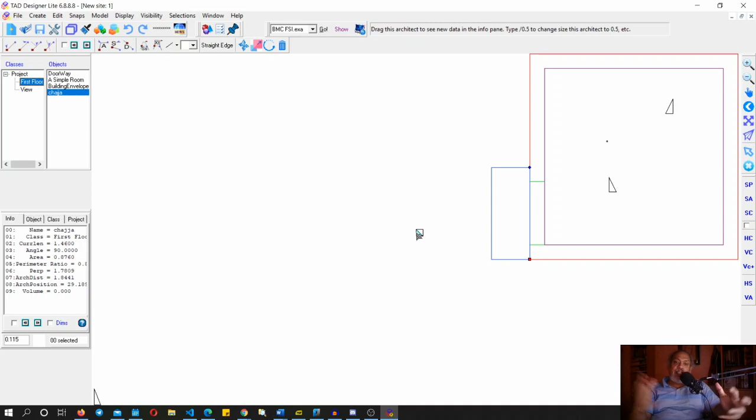Now, as you may have seen in the earlier video, I had explained about the architect and these two helpers, and let me revise that information again, because these three personalities are never seen in any other CAD software. People who have experience with, say, AutoCAD or SketchUp or 3ds Max will find that all those software have only the mouse and nothing else. Whereas TAD gives you these three personalities so that you can go ahead with your design very fast. Why so? Because it's a way of telling that I am right now focused on this particular object, and you train your brain to know what object the software is focused on. So you reduce the time needed to become familiar with what you are connected with.

You may have seen in certain text editors or word processors a blinking line, right? The line keeps blinking, and then you know that when you type something, it will be coming on that blinking line there. That's the way word processors work, where you can make out where that particular typed character is appearing.

Okay, I'm sorry, I'm a little distracted because I have this 2 monitor setup, and that sometimes misbehaves. The mouse cursor disappears, and that's irritating.

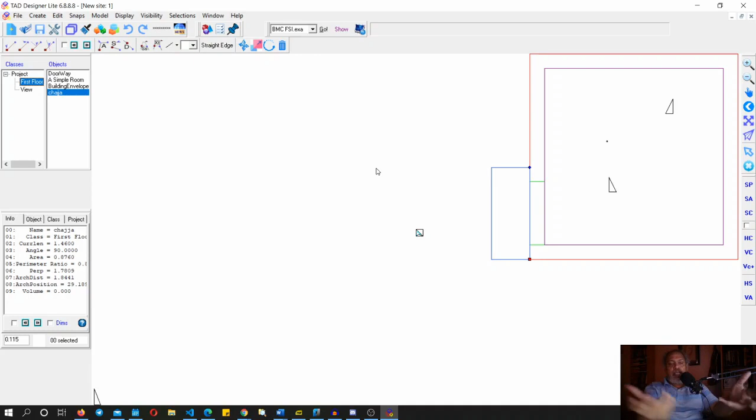When the mouse cursor disappears or that caret stops blinking and you have a completely blank screen, which does happen sometimes in some word processors, you're lost. You do not know where you are and where the next letter you type would be.

There are times when you thought that the letter should have come on this part, but then it turns out that it appears somewhere else, and then the caret starts blinking there. It's really very irritating.

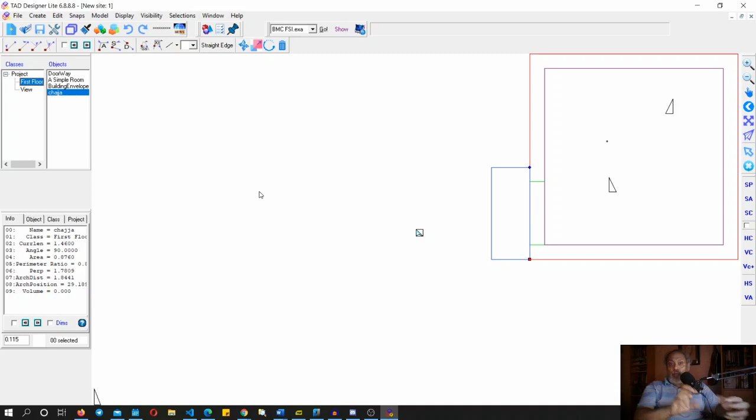So along the same lines, if in a graphics program all you had was your mouse and nothing else, then half the time you are actually teaching that software where you are located, and you're clicking on things and then you're seeing the grips over there, and then you go about doing it. That doesn't happen in TAD. In TAD, these helpers are always telling you that, okay, in this particular case, I am on the Chajja, and that Chajja is placed on the first floor. So you are comforted. You don't need to solve that particular problem at all.

You would take the architect and move that architect around in many different locations, and as that architect is moved around, you'll find that it actually gives you information here. This is called the info pane, P-A-N-E, like a window pane, and you will see that there are various dimensions and areas which are related to wherever the helpers are. The helpers and the architect are always going to be there inside a TAD model. That's a given, that's a concept by which it works.

Now you can very precisely locate the architect. Say for example, I want to locate the architect at this particular corner. I can just Control J that, and it can actually precisely locate itself on that particular corner. Okay, so that you can do with this particular button also, the fourth button here. These 4 buttons are for snapping the architect at various locations.

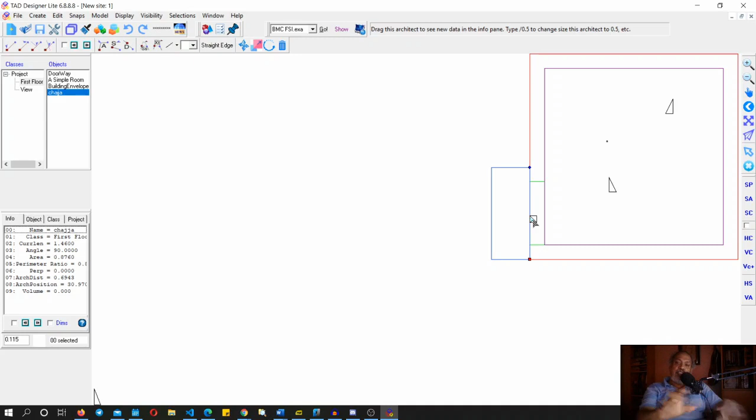If you press this button, it snaps to the first helper. So the architect is now shifted and precisely located itself to the first helper. This one locates itself to the second helper. And if the architect is somewhere else, and this is where the helpers are, if you press this, that is snap to the foot of the perpendicular containing the line where the helpers are, then that's where the architect will go. So you have these 4 different ways by which you can snap the architect very precisely, and that gives more control over the information which you are getting here. So that's one very straightforward way by which you precisely locate the architect inside TAD.

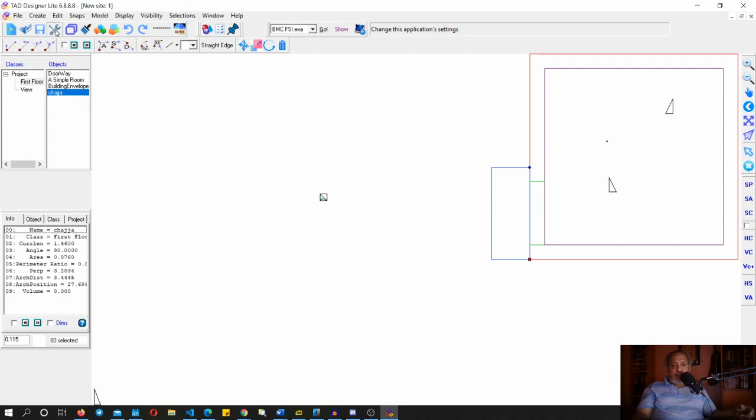Now there is another way which I many times don't use because I'm a free-form kind of thinker, but I do respect people who want to use a modular grid. They'll sketch out on a dotted paper or a graph paper or something like that. So you can do that here also. You just switch on the grid by going to the preferences, and once this grid is switched on, the architect will always snap onto the nearest grid. Okay, so this is another way by which the architect is moved around.

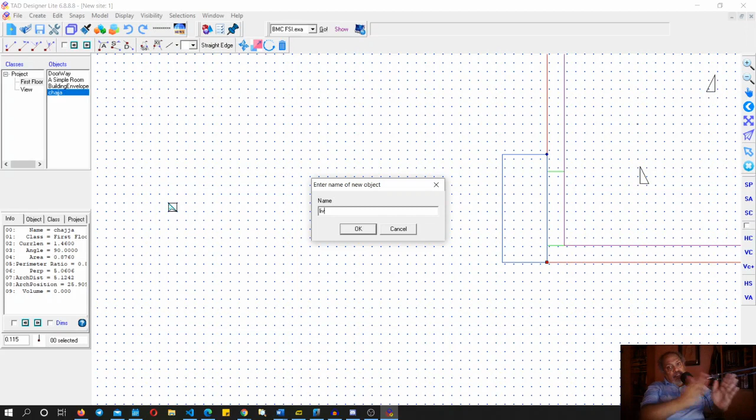And not just that, when you're drawing an object the way I showed in my earlier video, it will snap the bottom left corner to the nearest grid, and the other 2 dimensions, the width and height, would be made on the number of units which that grid is consuming. So if you have marked out a particular rectangle which consumes, say, 3.75 grid units, then it will actually snap to the 4th grid unit, and so you'll always get multiples of the grid size. So as you can see, it is actually snapped here clearly, and this length is exactly a multiple and this height is exactly a multiple of that particular grid size.

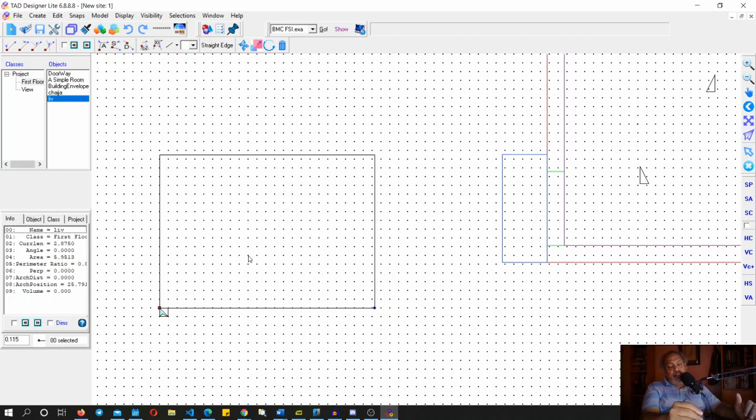Now it may not look as if it is snapped correctly. That's because of a detailed thing which happens inside. All CAD software has this situation where it has to convert numbers like 3.986395 into integers, because the screen is a set of integers. It's got dots over there. It can't handle anything halfway in between, and that's why you may think that it is not as per the grid size, but if you zoom in enough, you will find that it is actually on the grid.

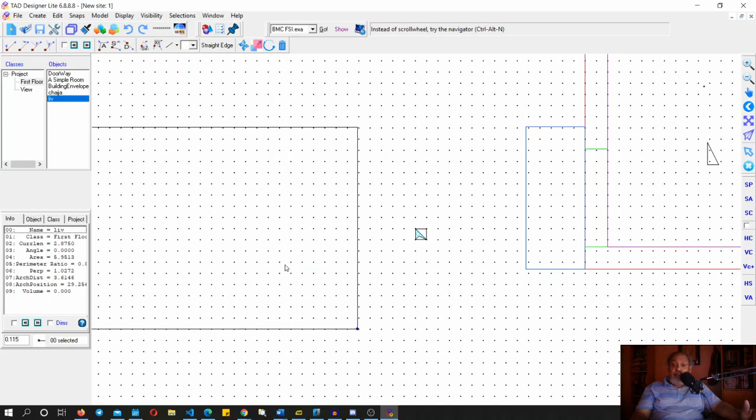Or you can measure it yourself, and you'll see that the current length is 2.875 from what I can make out from here, and the grid size is 0.115. So you'll see that that is actually divisible by 0.115. If you want, you can check that. So let's do that.

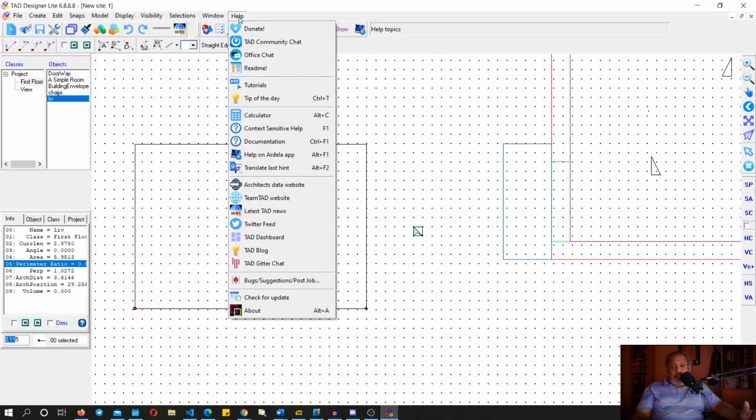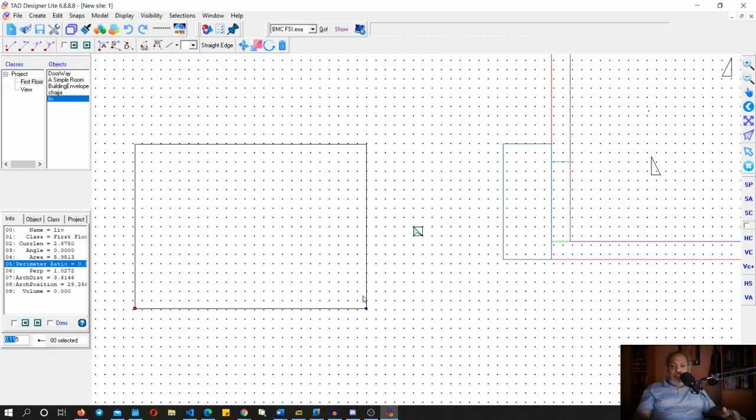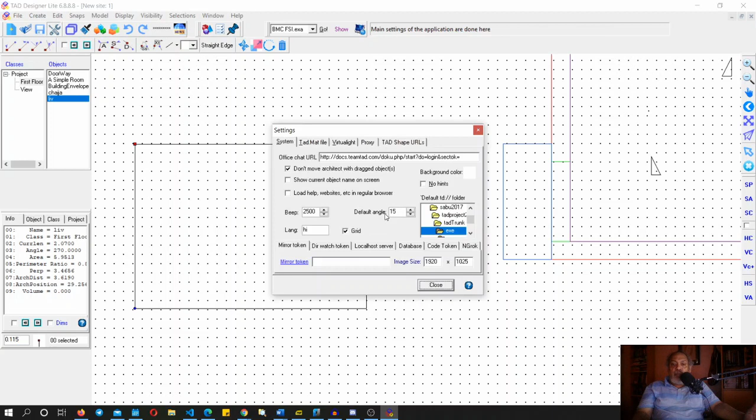Let's take the calculator and see: 2.875 divided by 0.115, and you'll find that it is exactly 25 grid modules. So there are 25 units of the grid here, and whatever that particular height also would be, it's grid units. This is another way by which you can create precise sizes of shapes if you want to. I personally don't use this feature much, but I know people who do, and I respect that capability.

Now you may wonder, what is that grid size? I forgot to tell you this - the grid size is actually the size of the architect itself. The architect is now sized at 0.115, and if I park the caret here, that blinking line, I can move the architect around by just pressing the arrow key. The one jump of the arrow key moves the architect precisely to the next point, by which you can very precisely locate objects.

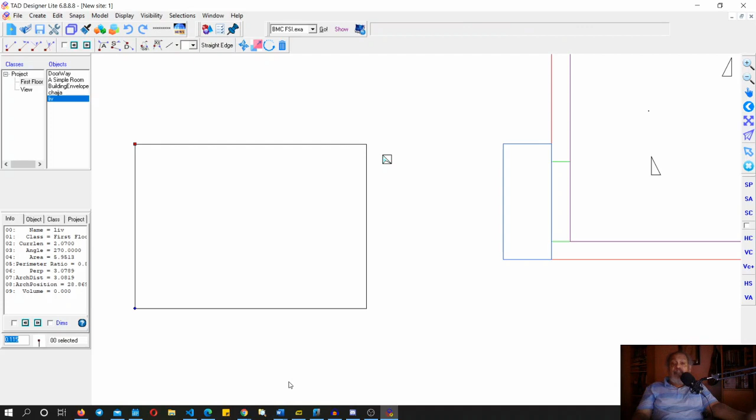Many times I can use the architect itself as a spacer. Suppose I use the architect's dimension as 0.115, which I often do because the internal walls of rooms in New Bombay are all 115 mm, which is 4.5 inches more or less. So this 115 is kind of a unit which is seen many times. Now let me zoom in a little bit here so you can see it for yourself.

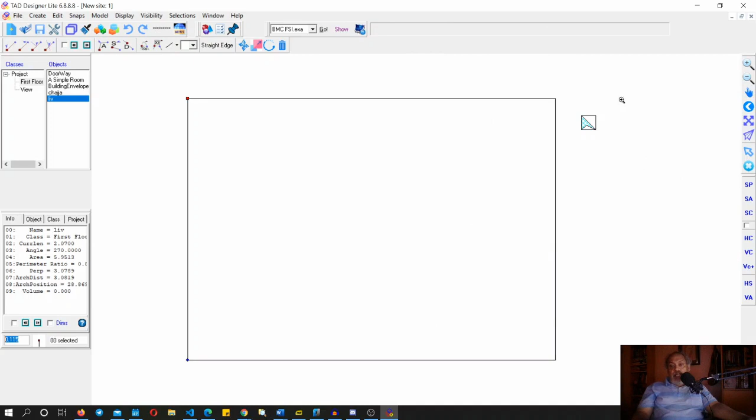I can keep the architect at a particular location and snap an object in such a way that it is precisely located on one of the four corners of that architect - I can snap it to the top left corner, or the top right corner. Sorry, I think I accidentally shifted the architect itself. If I right click on that architect, it moves back to its earlier location - it's like an undo for the architect.

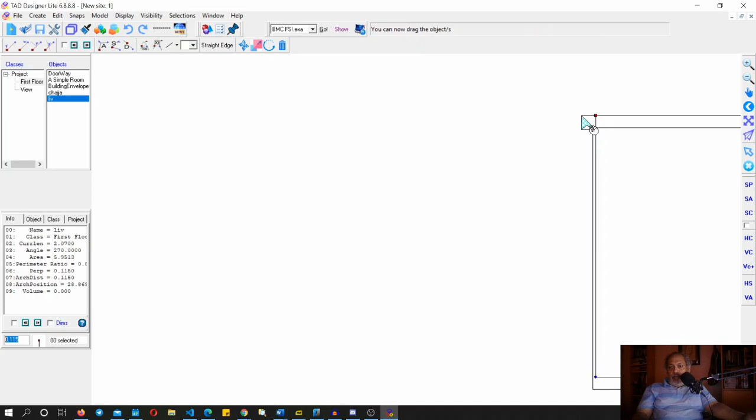So now I go to the top right corner and the object is snapped over there, and now I'm snapping the object to the bottom right, and now I can snap it to the bottom left corner. So there you have it - this is another way by which you can very precisely relocate objects and resize them based on your dimensions. Sorry, I didn't show you the resizing part, but you will come to know very soon.

Now there is another way by which I can shift the architect. I've temporarily shifted it somewhere here, but let's say I want to resize this particular object. Let me move this object somewhere here, and now suppose I want to make this exactly - what is the current dimension? It is 2.07. Suppose I want that dimension to be 2.5.

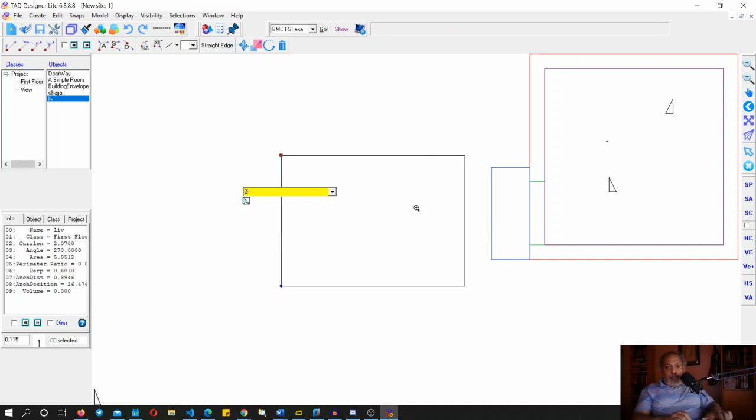So what I do is I just type 2.5 and say angle of 0. What TAD does is take the architect, figure out the angle - 0 being the angle to the right of that first helper - and move exactly 2.5 meters from there. So I move it over there. Now I know that this point is exactly 2.5 meters, which you can verify with the perpendicular distance here.

It says 2.5. Now what I do is use this button - I can use F3 or F4 hotkeys, and make sure that the helpers are on this edge, because I want to now stretch that so it meets that location of the architect. Now that command is this particular button - it says stretch the current side. So I just stretch that, and there you have it - I have precisely resized it to 2.5 meters.

So I gave you two commands here. One is the way to move the architect to a precise location using a dimension, a space, and the angle sign. This is what I had written - I'll show you. So I wrote 2.5, space, angle 0. Whatever your earlier commands are, they're all shown here also, so it preserves the history of your various commands in case you want to repeat them later.

Suppose you want to use the same command and I want to make it square, so I'll say minus 90 degrees. The architect will go down here with respect to the first helper, to 2.5 meters down there. Now I press enter.

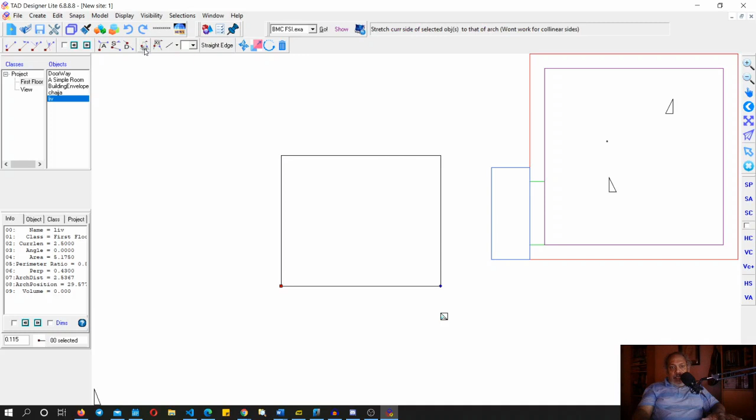So this is now 2.5 meters, and I again press the stretch command, and now you have a perfect square which is 2.5 meters by 2.5 meters.

So this is another way by which you can get precision, by which you are commanding the architect to move to particular dimensions. Another way the architect can be moved is, say I want to move it diagonally. I'll snap exactly to this particular corner, and now I don't know what the angle here is. I could find out through Pythagoras theorem, but let's say I don't want to know. I know this is snapped here and the first helper is here, so there's an imaginary line you can join from the first helper to the architect.

And now I'll say 2.5. I don't give any angle, nothing, I just press enter. So what it does is this particular length from here to here is exactly 2.5 meters. It extrapolates on the same line and puts the architect on the dimension.

Now what I'll do is stretch both these edges. I'll use F3 and stretch this here, then press F3 again and stretch that here. Now I've got a square where the diagonal is actually 2.5 meters. You can see that for yourself.

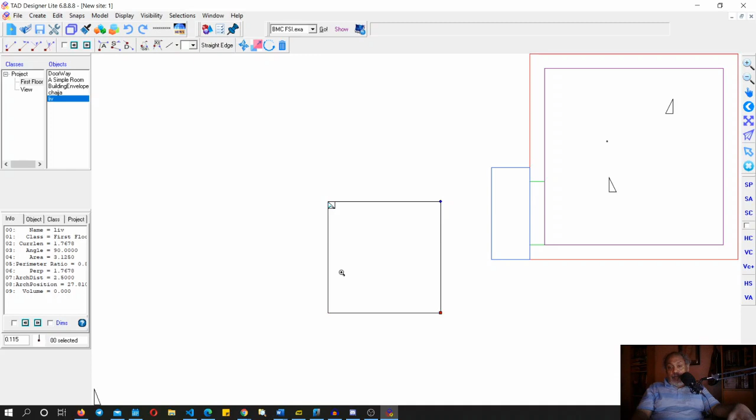I shifted the helper using F3 and F4. You can use these two hotkeys to move the helpers around on the same object. And now when the helper is here, I can see the dimension from this corner to this corner by this distance, which is the architect distance. It is saying 2.5 meters.

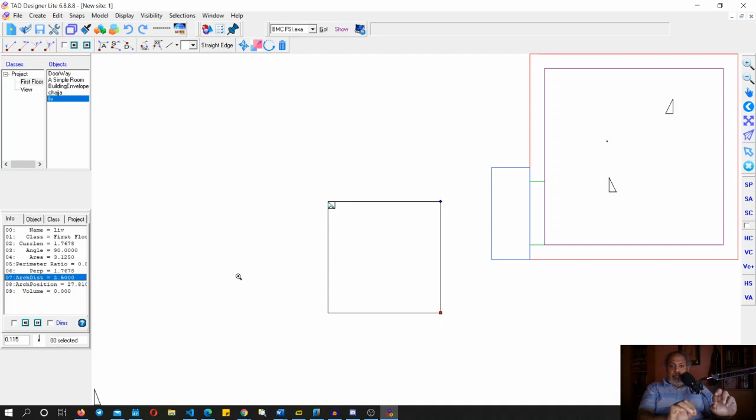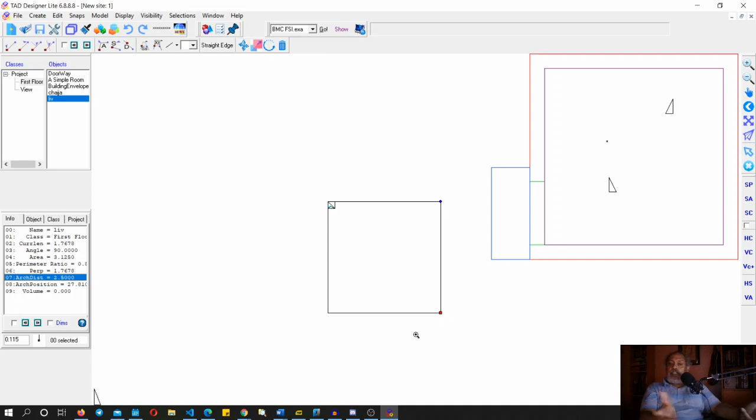So you have two basic methods by which an architect can be moved using that yellow command line you saw. One is by just giving a number and pressing enter, in which case it extrapolates along the line from the architect to the first helper. Or you give a number, space, the angle sign, and a value for the angle, and it will locate that architect as per that dimension and angle. This is more than enough to really locate the architect very precisely wherever you want.

Mind you, the helper is making a big difference here. It is giving you a temporary origin, as they say in AutoCAD and such. I think you can set something of this sort there too, but you have to manually set it. Here it is always available because you can just shift the helpers to wherever you want, and that origin point starts from that helper.

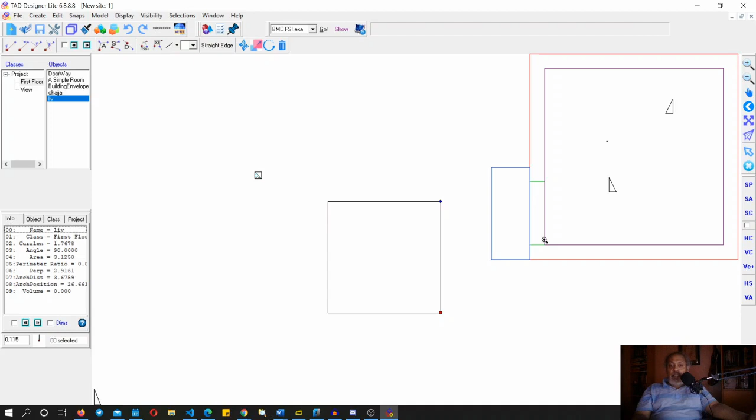Okay, so that is another way to do this. A third way I want to show you is that once you locate the architect very precisely, let's say this architect was located here precisely, you can move other objects. If you have selected many objects together, let's say I have selected all these three objects, now I want to move this first helper to this point and relatively everything else also shifted.

I can do that by using this particular key. So I just click that and then the button. So everything is relatively moved in such a way that the first helper is precisely on that particular architect, and everything else is relative to that.

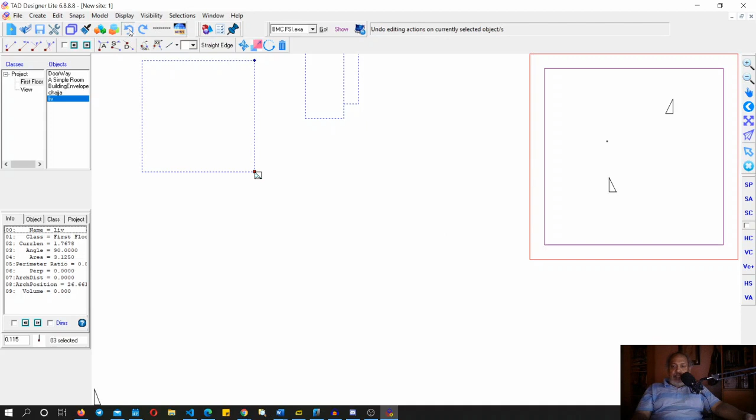Now TAD has got a beautiful undo system where each object has got its own undo. So now that I've selected all these three objects together, I can undo all three together. This undo feature is extremely useful because since each object has its own undo history, you can go to a particular object and undo just that object.

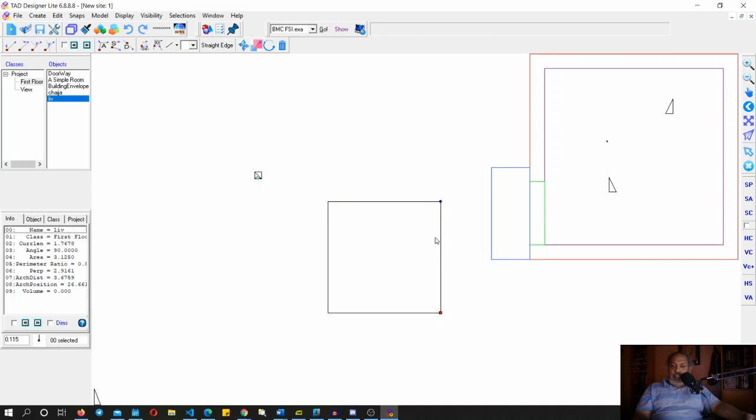Say I've done all these edits. I'll remove all the selection. Now I can undo only this particular object because that's the current selected object. So if I do that, it actually undoes just that particular object, without affecting the other two which were also part of that edit history, which is another very powerful feature.

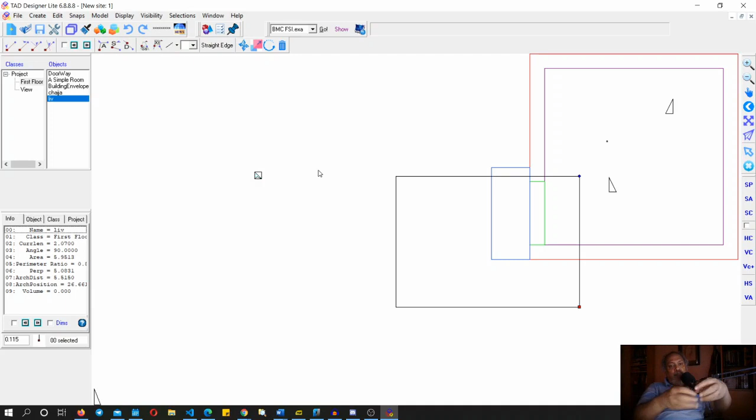Many times in CAD software, AutoCAD and many others, you have carried out a series of edits and then you realize you want to undo it, but you don't want to lose something you've edited. You want that edit to happen but not the rest, and then you're stuck because if you're undoing, it will undo in the same order as you have done something.

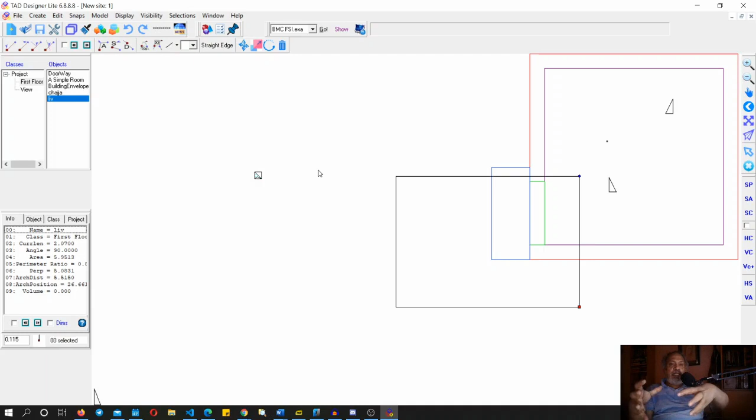I don't know why these people have never solved that problem. Invariably, you end up creating more and more files because you don't want to lose your work. You'll save the file somewhere, then undo everything, and now you've got two files, and you'll pick up that object from the earlier file. It's such a mess actually. That never happens in TAD. You are always working only on one file all the time.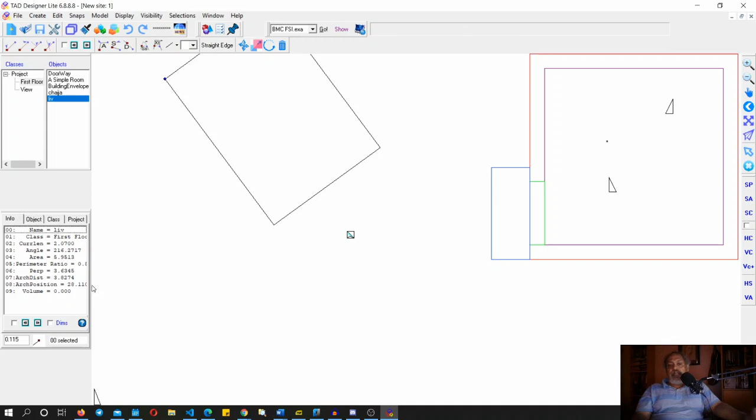So the third thing which I want to show you is how do you rotate. Rotation can be done free form, so I can just rotate around the anchor like this, and when I leave the mouse it will rotate, but I don't know what angle it is unless I look at all these values here.

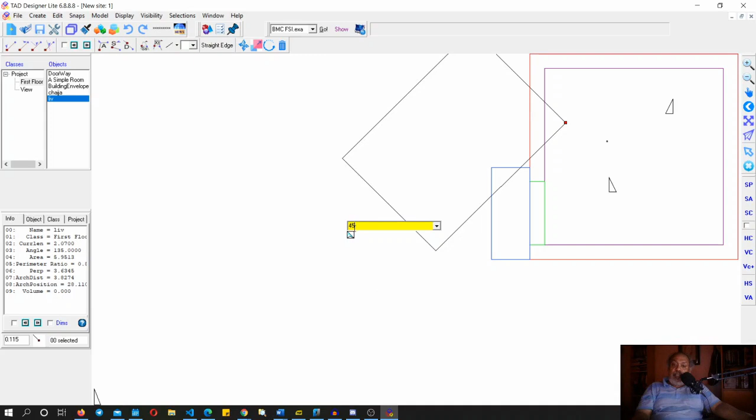But what if I were to rotate precisely around that anchor? I can just type 45, leave that command line open, don't press escape. When you press escape it will close, and then I just rotate, and it will rotate at 45 degrees because that's what I've written here. This is a very precise way of rotating, so you don't have to think about what angle you rotated it to.

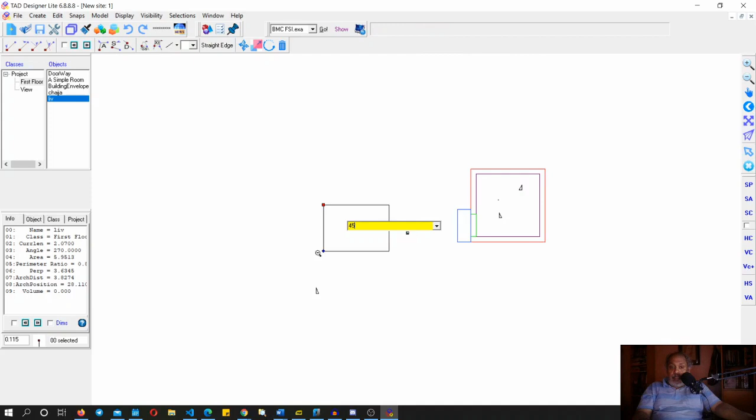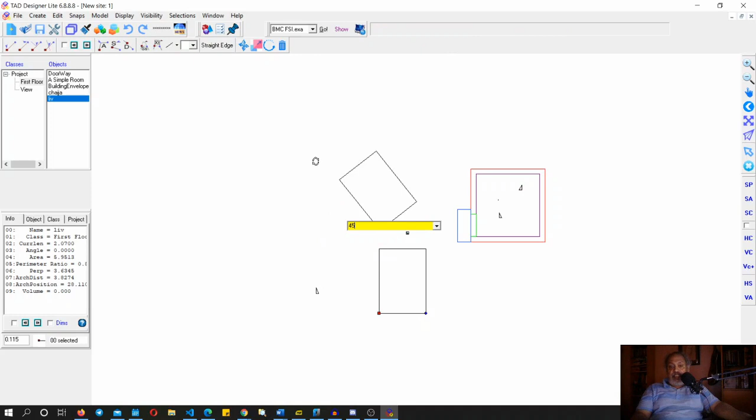I can do this again, and each time it will rotate at 45 degrees. The only disadvantage, if you want to call it that, is that in case of 45, being a positive number, it will always go anti-clockwise. So even if I rotate in this direction, it will still rotate in the positive, anti-clockwise direction, even though I may have shown the rotation as clockwise.

That is how this particular command works. But if you do it free form, there is no such restriction - it will follow the way you have rotated that object. So this is a very precise way by which you can rotate objects and locate the anchor. You can use the grid, and move a set of objects precisely to various locations, and that's how you end up shaping the positioning of things.

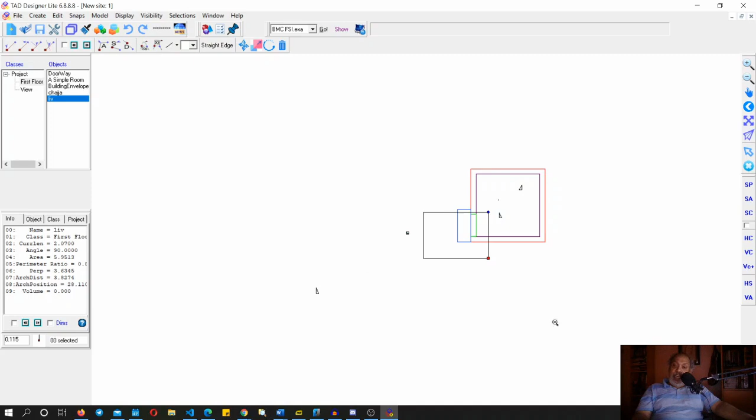In another video, I'll show you how you can edit a particular shape and what all commands are there to edit that shape into whatever lovely shape you have in your mind.

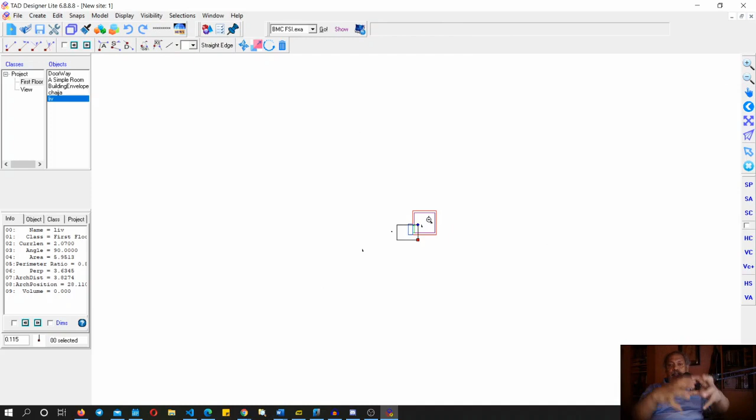Since this particular mouse is in zoom mode, if I accidentally create a window, it will think that you're trying to zoom, and therefore it executes that. That's what is happening. I am a little away from the monitor, so I'm not able to see very clearly. Since I'm recording this, I had to position my laptop in a particular way. So there you have it. This is what TAD does. I hope you are able to understand how TAD works and how you can very precisely create shapes.

As you can see, TAD does not object if you do something illogical, like now this particular shape is intersecting the other, because these things do happen when you're sketching out a design where you have not yet fully firmed up on what you want to do, and TAD does not say you can't do this, this is not right, this is not allowed. Nothing of that sort. It's a loose-limbed, loosely coupled system at work in TAD.

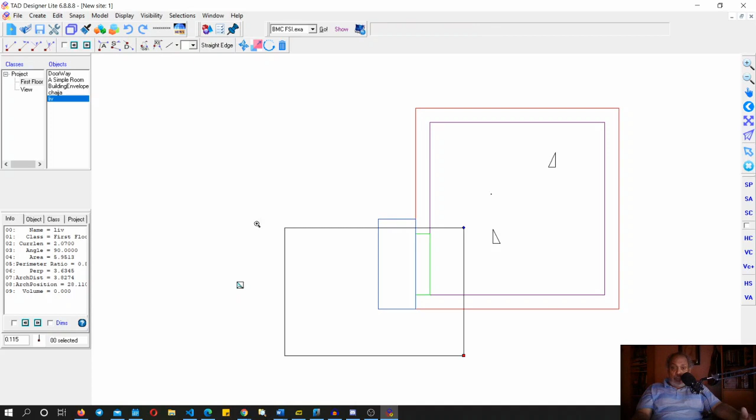So have I missed anything here? I spoke about the grid, how the anchor can be moved very precisely, how objects can be rotated, how objects can be moved very precisely, how you can do selection and then move that. Selection actually works - many of the commands work with selection also, but I'll probably do another video on how to use the selection feature. I gave you an idea about the undo. I think I pretty much covered another bunch of topics inside TAD.